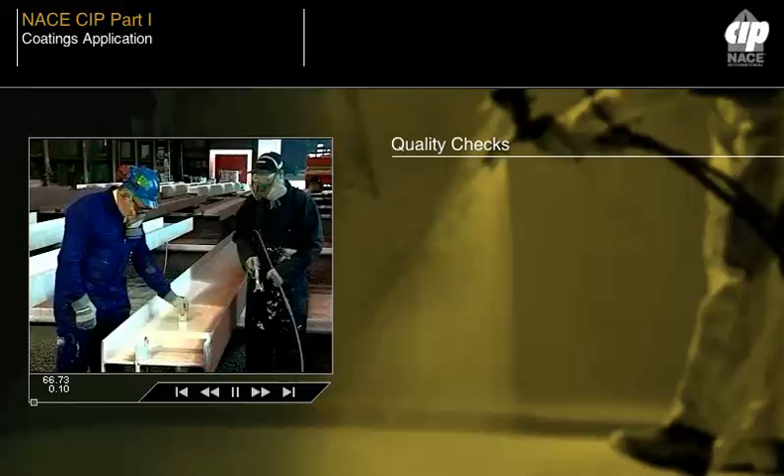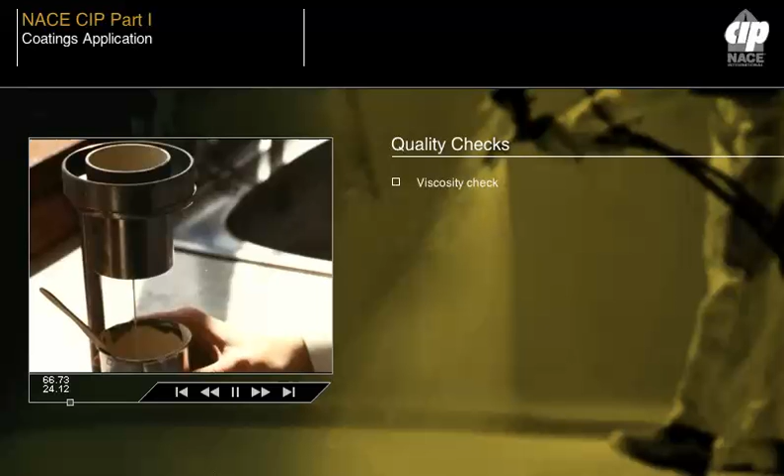The range of paint tests that may be successfully carried out on site is limited by both the difficulty of handling complex laboratory equipment and by the lack of laboratory experience of most site personnel. In practice, the common tests which may be performed are viscosity check, to check suitability of flow characteristics and quantity of added thinners,

wet film thickness check, to ensure that the film will achieve the desired DFT, visual checks on condition of paint, batch numbers, storage time, condition of paint container, label details, etc. Further visual checks can be made on the drying coating film after application, looking for coating condition, gloss, misses, pinholes, etc.

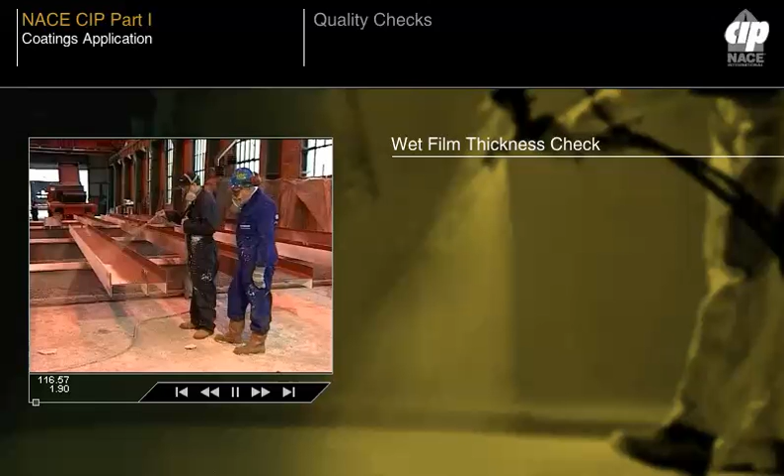Measurement of wet paint film thickness provides a useful guide for inspectors or paint sprayers to ensure that a correct and even film thickness is being applied to the article being coated. Use of a wet film comb at this stage of a paint application operation helps to prevent reject work, which in itself is time-consuming and therefore costly.

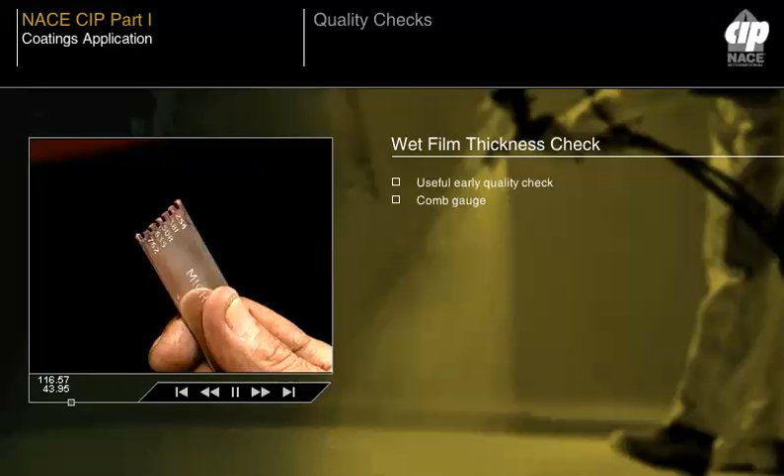The most common instrument for measuring wet film thickness is the comb gauge. It consists of a series of graduated teeth lying between two level outer ones. Combs with different scales are available. The WFT gauge consists of two end points on the same plane with progressively deeper notch steps in between.

The instrument is pressed firmly into the wet film down to the surface and withdrawn. The two end points will be wetted by the coating material and maybe some of the steps in between. It's important that the gauge is held perpendicular to the surface and not dragged across the surface.

The WFT is measured and reported as the last wet step observed. If no steps are wet, the gauge needs to be turned to a different measurement range that can measure the WFT of that particular coating. Metric calibrated WFT gauges are also available, which give coating thickness measurements in microns.

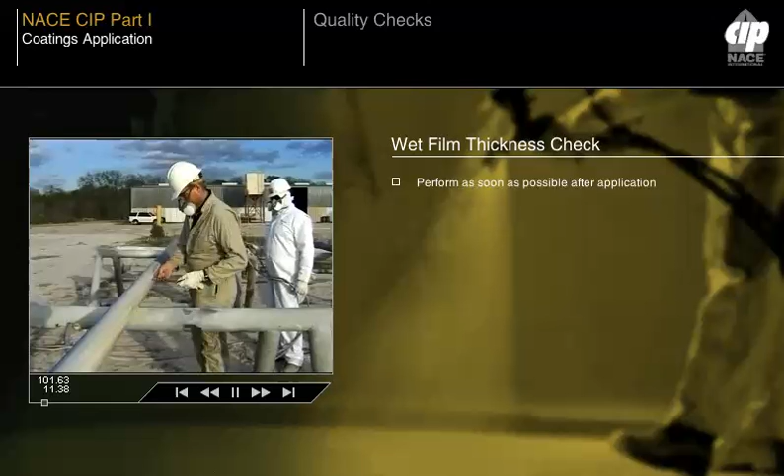Wet film thickness readings should be taken as soon as possible after coating application. As soon as coatings leave the spray gun, evaporation begins and the percentage of solids by volume changes slightly. This is especially true of spray application where the coating travels through the air.

Care must be taken that the instrument is not used on any surface irregularities that might distort the measurements. On curved surfaces, readings should be made along the length of the curve rather than across its width to prevent irregular wetting of the steps. The gauge must be wiped clean of all coating after each use to prevent the possibility of inaccurate readings due to coating buildup on the gauge.

The gauge may leave marks in the coated surface that may adversely affect the integrity of the coating. Those marks should be immediately overcoated with fresh coating to avoid pinholes. Guidance may be provided by the specification regarding use of the WFT gauge. Some WFT gauges, particularly those made of thin gauge metal or plastic, may quickly lose their accuracy and should be replaced frequently.

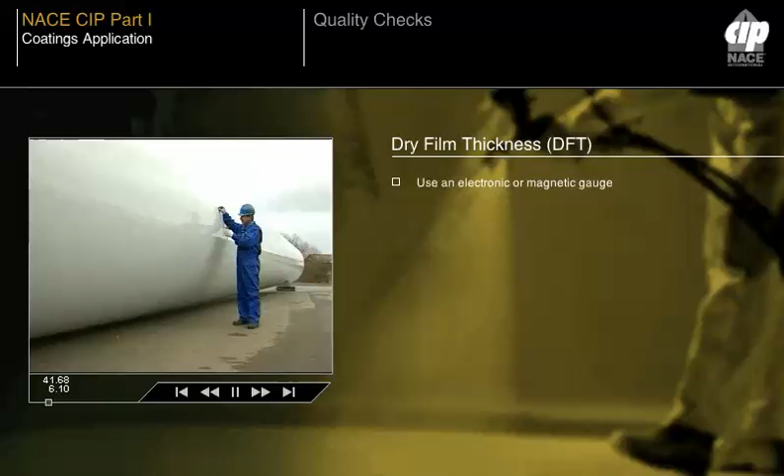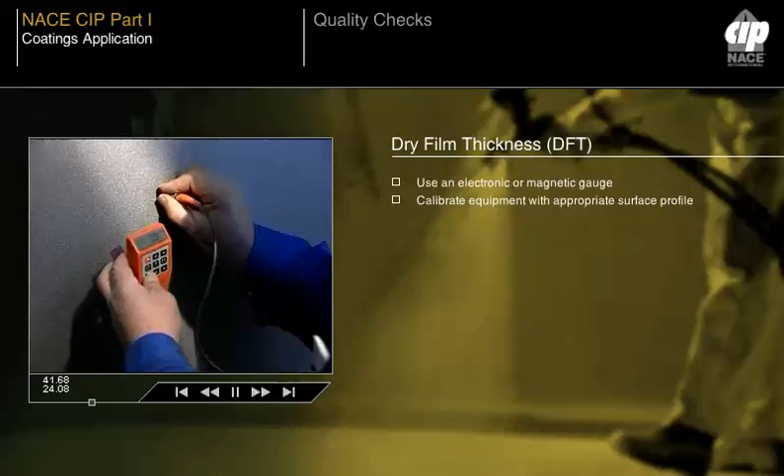Dry film thickness, DFT, will normally be measured using an electronic or magnetic gauge. The instrument must be calibrated if accurate measurements are to be made. For best results, calibrate the instrument on steel whose surface profile matches the profile of the painted surface being measured. Using shims of known thickness, calibrate the instrument in the expected range of DFT to be measured.

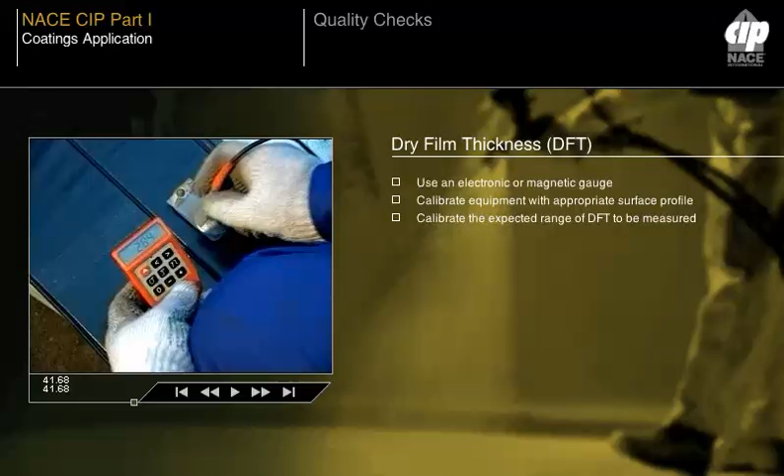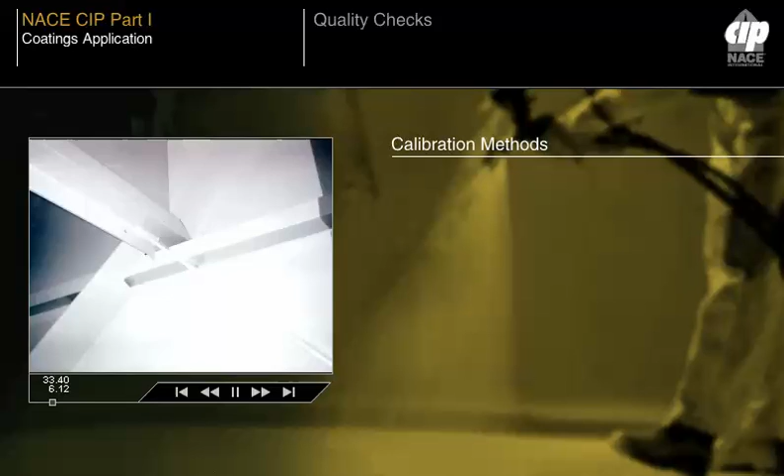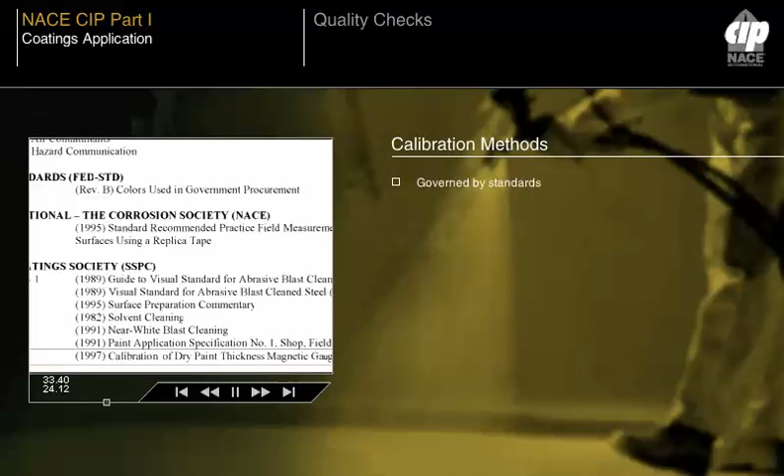Access to a clean blasted surface is not always practical, and other calibration methods may be used. Calibration of the DFT gauges is an important issue and may be governed by SSPC, ASTM or ISO standards. These standards are discussed in the inspection module of this course. When a particular standard or method is required by the coating specification, that method should be used.

In the USA, smooth calibration shims produced by NIST are commonly used. If gauges are calibrated on a smooth surface and then used to measure coating thickness over a rough, blast-cleaned surface, an adjustment must be made to ensure accuracy.

One system sometimes used is to obtain a small sample of steel approximately 6 by 4 inches, 15 by 10 centimeters, and have this blast cleaned at the start of a project. This panel can then act as a reference panel as to the surface profile agreed and a calibration panel to check dry film thickness gauge measurements.

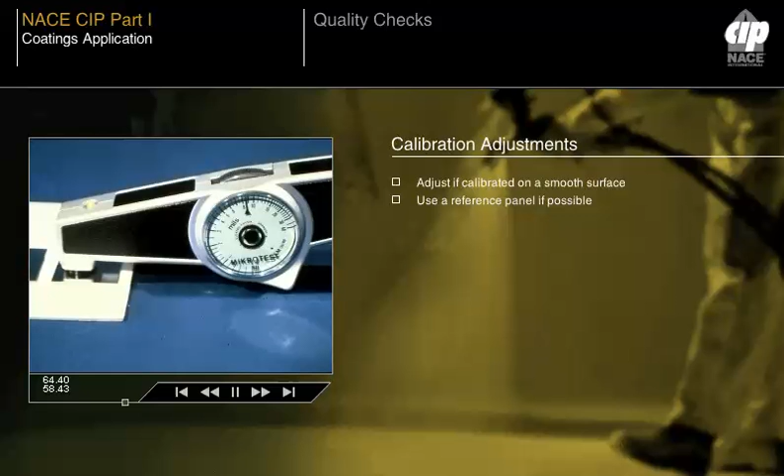The panel should be of similar material, i.e. steel alloy, and similar thickness to that of the structure being coated. Use and calibration of DFT gauges is discussed in more detail in the inspection module of this program.

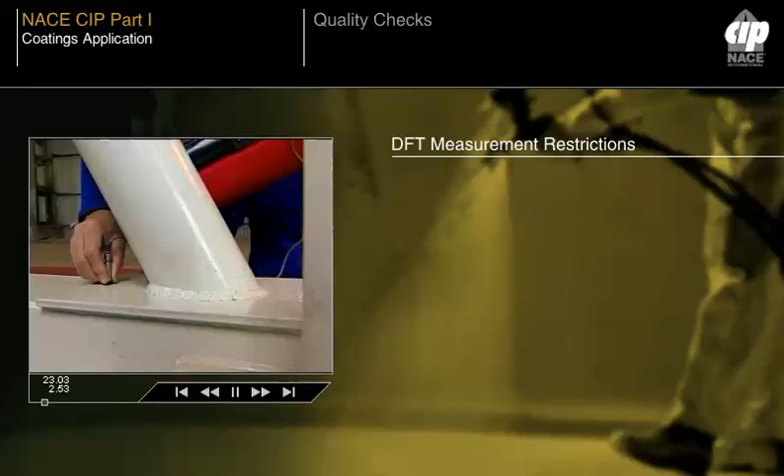It is generally not good practice to measure DFT closer than 1 inch, 25 millimeters, to an edge, hole or inside corner. The probe must not overlap the edge of the sample being measured unless recalibration procedures are undertaken.

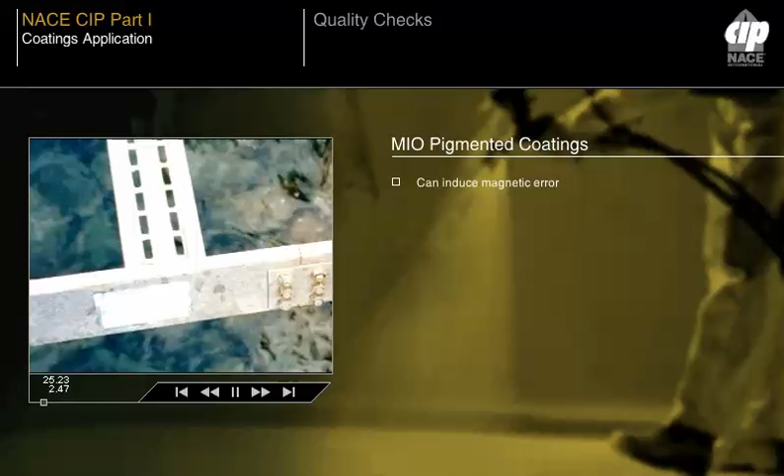Because MIO pigmented coatings are sometimes capable of inducing a magnetic error, DFTs cannot be reliably measured on some coatings, so it's important to frequently check the WFT during application. While this effect may not be common, it can create real measurement problems when it does occur.

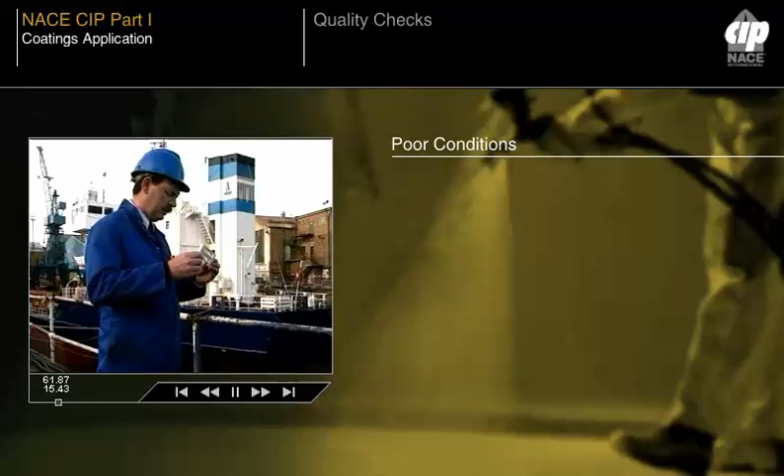Application of coatings during poor weather conditions is likely to result in a lesser quality coating film and reduced protection. Quality control on site should monitor relative humidity, dew point temperature, and the temperature of the surface being coated to avoid problems with coatings being applied to a damp surface, freshly applied coatings becoming affected by moisture soon after application,

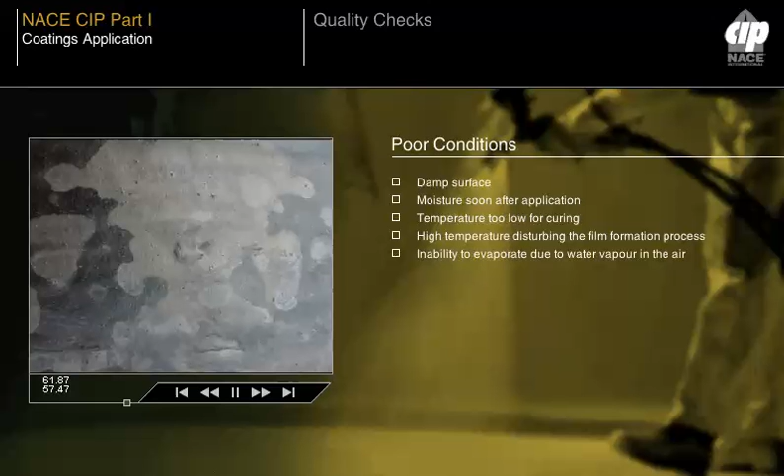coatings being applied when the temperature is too low for the curing reaction to proceed, coatings being applied when the surface temperature is too high and the film formation process is disturbed, coating solvents being unable to evaporate due to high partial vapor pressure.

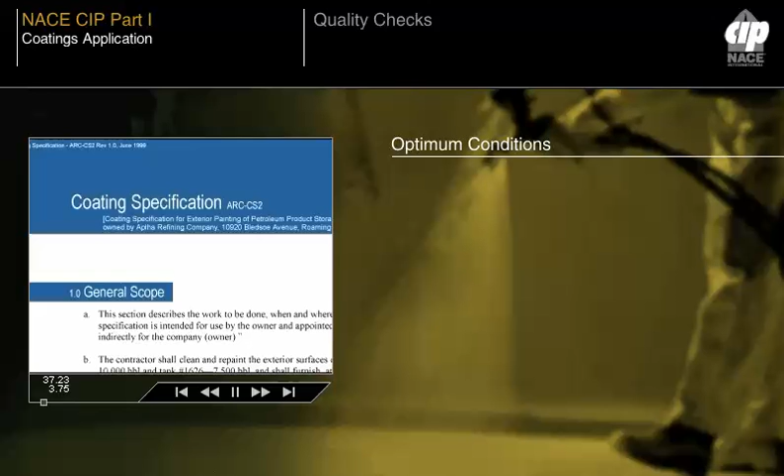As a general guide, a specification is likely to require the following conditions. Air temperature is greater than 5 degrees centigrade, 40 degrees Fahrenheit. The surface to be coated is dry. Relative humidity is lower than 90%. Steel surface temperature is at least 3 degrees centigrade, 5 degrees Fahrenheit above the dew point temperature. If any of these conditions is not met, coating application should not be performed.

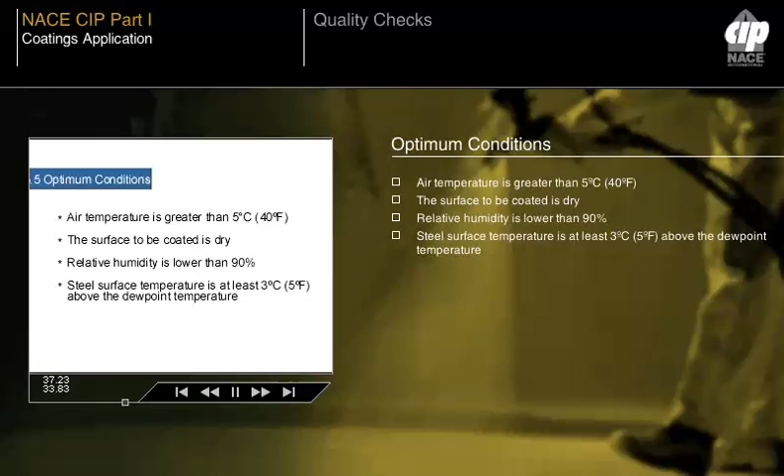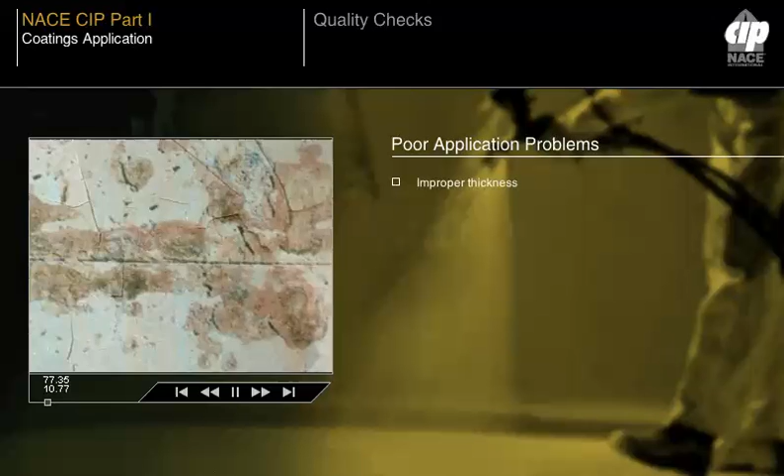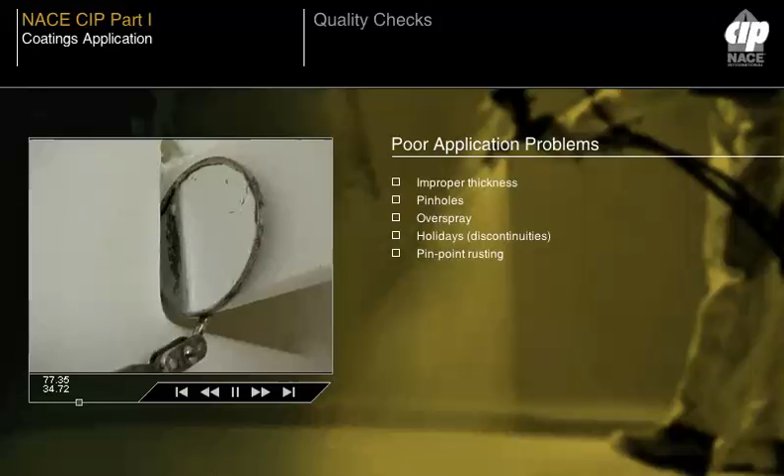Poor coating application is a major factor which causes failure. Typical problems resulting from faulty application techniques might include improper thickness, pinholes, overspray, holidays, discontinuities, pinpoint rusting. Almost all application-related failures are due to poor workmanship, though this may sound like harsh judgment. Poor workmanship refers to such practical issues as holding the spray gun too close or too far away from the surface, or at a significant angle to the surface being coated.

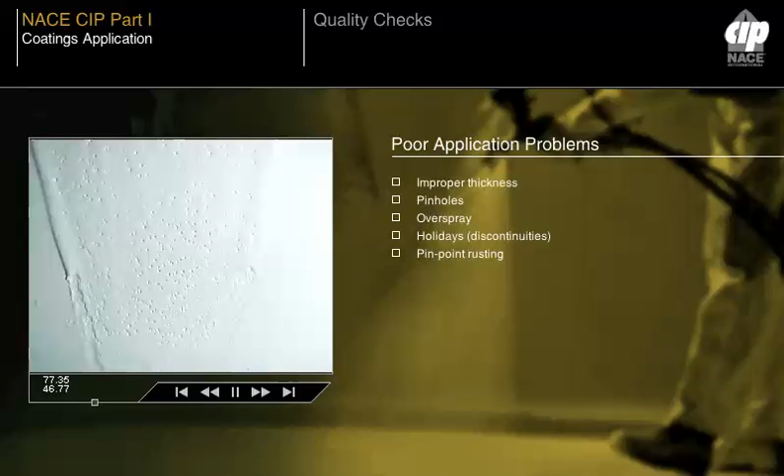These matters are largely a question of training or the lack of it, leading to a simple lack of understanding of what causes paint application problems. It is important that painters are trained in the skills of paint application, particularly those who are involved in the application of modern, high-performance coatings. Good workmanship cannot be guaranteed. The specification must require good workmanship, and the inspector must be trained to recognize an acceptable quality of work.

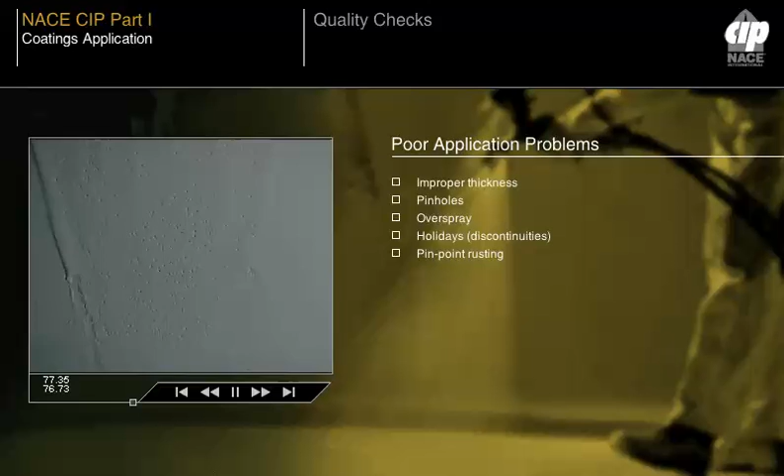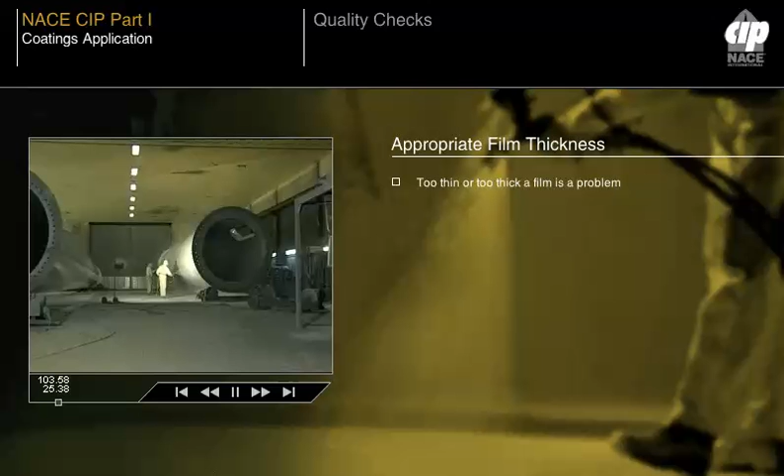If coating is too thin, pinpoint corrosion can occur. If too thick, the coating may crack. High film thickness is likely to be a bigger problem than low film thickness, due to development of stress during the coating drying and curing cycle, and is more difficult to correct than low DFT. Over-thick coatings may retain solvent, leading to problems with cure and possibly to blistering in extreme cases.

With polymerized coatings, particularly those intended to be applied at high DFT, 20 mils, 500 microns per coat or more, there may be internal shrinkage due to the excessive thickness, leading to cracking, flaking or delamination, loss of adhesion. Care should be used to ensure that the application stays within the recommended parameters, particularly film thickness.

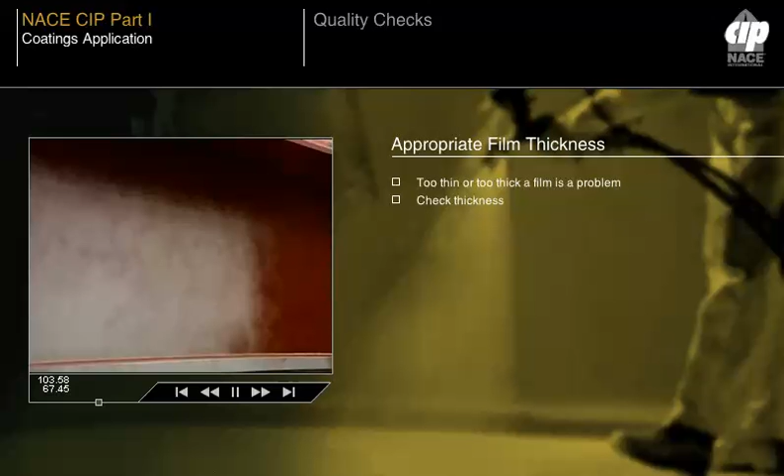Coating should be applied in an even, uniform film, allowing coating to wet the surface. Use thin, multiple passes with 50% overlapping to achieve a uniform film and ultimately the final proper thickness. Special care in application is needed for control of single coat systems. Errors in coating film thickness applied cannot easily be corrected, and it is important to get the application right first time.

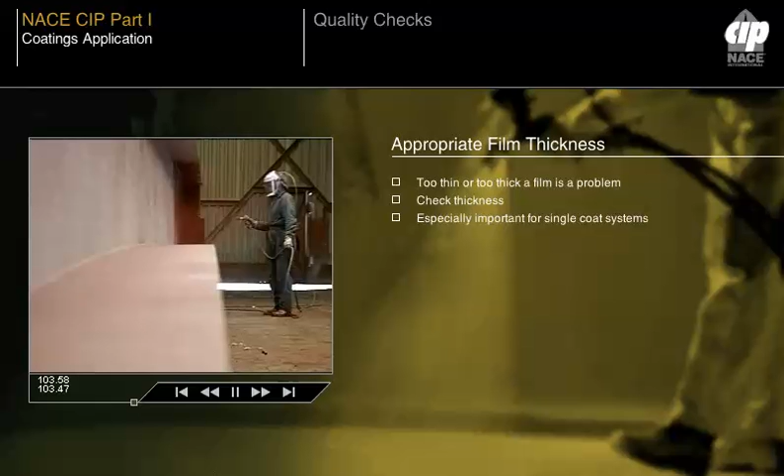Pinholes are small visible holes in a coating, often caused by application of a thicker organic coating over a porous surface. For example, coating epoxy over concrete or over inorganic zinc. Coatings with the wrong solvent balance may also suffer pinholing, caused by the inability of solvent to escape from the rapidly curing coating.

High ambient temperatures may also lead to pinholing, as the film sets more rapidly. Fast-drying coatings such as vinyl or chlorinated rubber are most likely to suffer pinholing. The fast-drying surface does not allow the air entrained in the paint as a result of spraying or the solvents to escape. The name often given to this effect is gassing. The effect can often be seen after application of coatings as a form of bubbling, rather like the surface is boiling.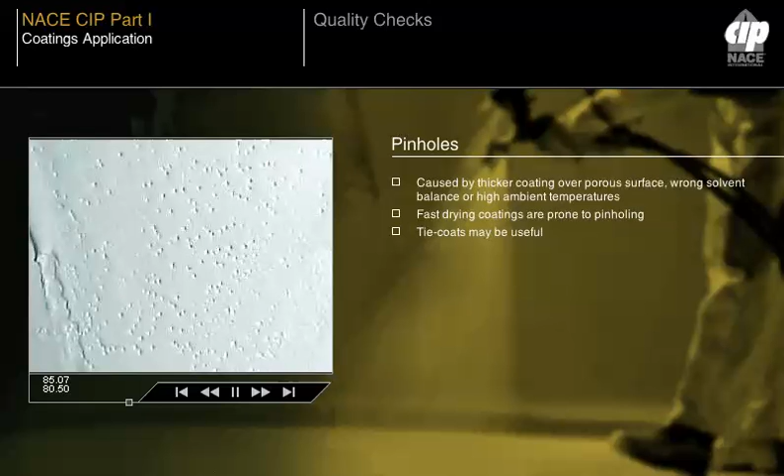Applicators may apply a thin coating, able to penetrate the porous substrate. These materials, when specially designed, are called tie coats. Alternatively, thinning the first coating with up to 50% thinner may help penetration of the substrate and achieve better adhesion.

Overspray occurs when the spray gun propels paint onto another surface which was not intended to be painted. This is most likely to occur when the applicator fails to trigger the gun, continuing to spray paint at the beginning or end of each stroke. Overspray generally adheres to the surface it reaches, leaving a rough surface. The main problem for the applicator is that coatings are applied to surfaces where it is not appropriate. The coating is likely to partially create a film, forming an ineffective barrier.

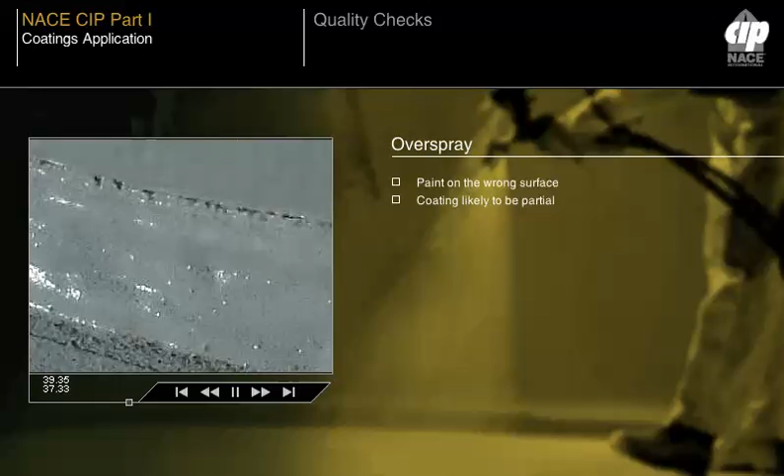Dry spray usually leaves a rough surface, which looks like abrasive dust in the surface of the coating. The dry spray is poorly bonded to the painted surface and may, in some cases, provide sufficient dusting to prevent adequate bonding of the next layer of paint, leading to an adhesion weakness in the system. The problem may be compounded by the entrapment of real dust and other contaminants in the rough surface of the dry spray prior to the next coating operation.

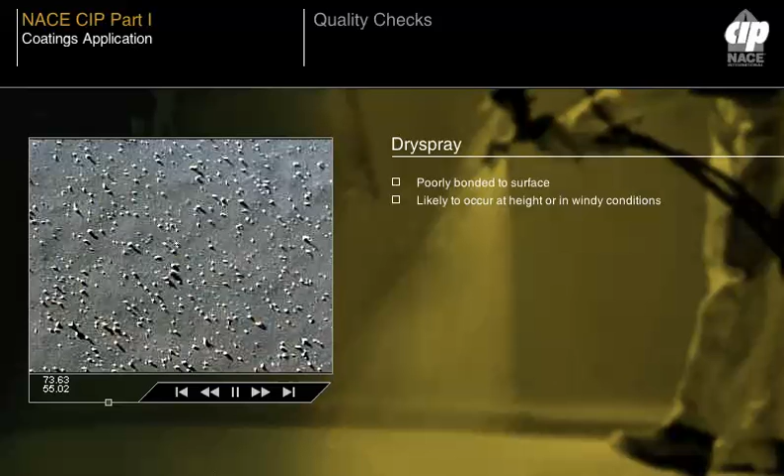Dry spray is most likely to occur when the painter is working at some height and the escaping paint particles can fall, drying as they go, or when the wind is blowing and paint particles can be carried by the wind. The applicator should ensure the spray gun is properly adjusted and apply coatings at the optimum distance to the surface. The coating should be fluid when it reaches the structure and wet the surface with good flow out. Coating should generally be applied in several multiple passes, overlapping 50%.

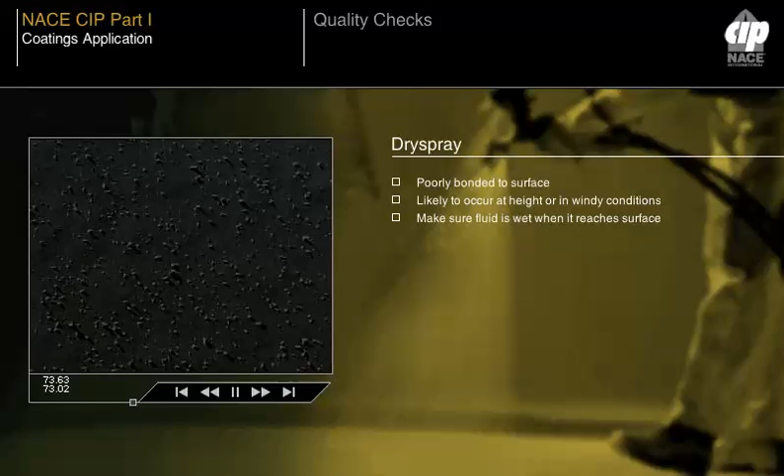Holidays are bare spots, misses, or even thin spots in a coating where the substrate is uncoated. They are generally more significant when the coatings are linings intended for immersion service. Pinpoint corrosion can occur, and premature coating failure is likely to be associated with any holiday.

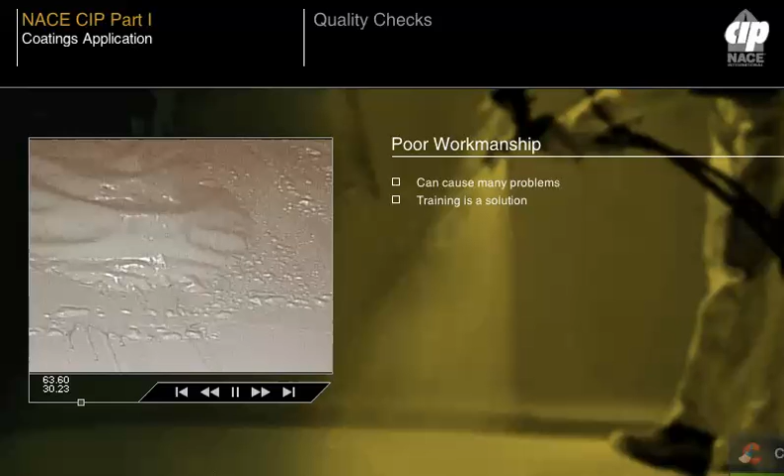Poor workmanship can encompass many factors of application faults, any one of which could cause or promote an active coating failure. Applying coatings over visible contamination, applying coatings improperly, either too thin or too thick with runs and sags, with pinholes, overspray, etc., could all be corrected or avoided with better application techniques. Poor workmanship can be overcome to some extent by training. This subject is discussed in some detail in the advanced module.

Proper training is essential, however, if the trainee worker is to become part of the team. Workers should be given the opportunity to understand the effects of workmanship on coating performance. It should then follow that they will develop confidence and pride in their workmanship that can go a long way to offset any application faults that reduce the life of the coating and lead to a coating failure.

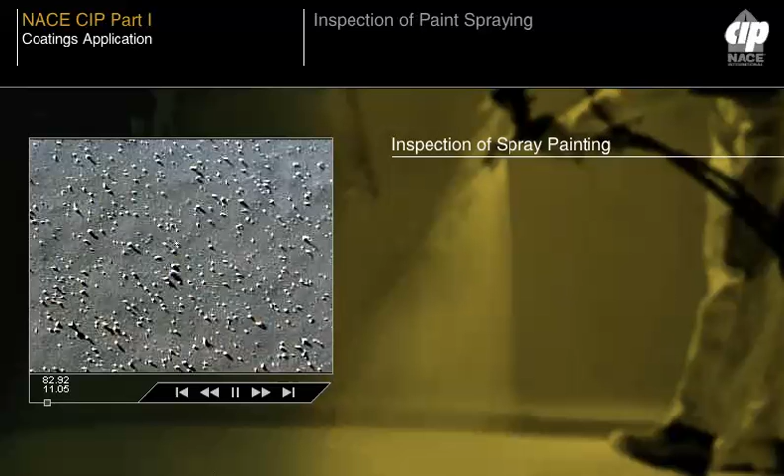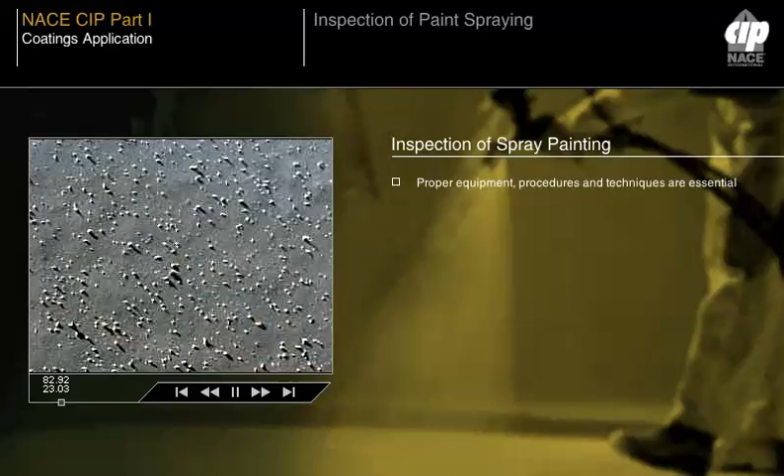The coating inspector must pay careful attention to the spray application of coatings. Many coating defects originate in the spray application phase of the job. Proper equipment, procedures and techniques are essential to a successful spray application of any coating. Equipment for spray application should be examined to determine whether it has adequate pressure regulating devices and accurate gauges.

In this connection, the inspector should be aware that the single pressure regulator and gauge found on many coating pressure pots controls only the pressure within the container and not the pressure of the air that atomizes the coating. With a single regulator, the atomizing pressure will be equal to that at the receiver of the compressor, minus the pressure drop in the hose lines. If the receiver pressure cannot be controlled to suit spraying operations, an additional pressure regulator must be inserted in the line between receiver and spray pot or between gun and spray pot.

Hose lines for spray equipment should be of large enough diameter to prevent excessive line drops in pressure, and compressors should be of adequate capacity to handle all air tools and equipment being used at one time. The interior of the fluid line must be clean.

Traps and separators for removing oil and water from the compressed air source should be operating and effective to ensure that the air does not deposit visible oil or water on the surface. The quality of spray air can be checked using the blotter test, ASTM D4285, just as in checking the quality of abrasive blast air.

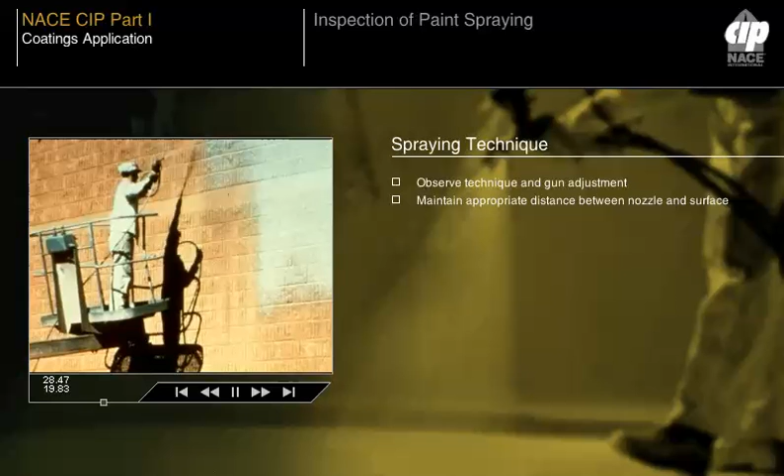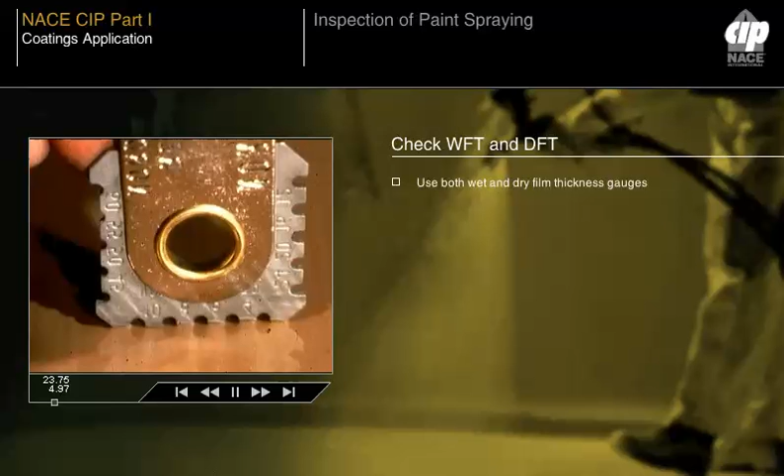The technique of the operator and the adjustment of the gun should be observed for any deficiencies that would result in non-uniform coating thickness. The use of the wet and dry film thickness gauges to point out areas of widely varying film thickness will generally have a very beneficial effect on the efforts of the spray painter to deposit uniform coatings. The dry film thickness gauge should be used to determine the final acceptability of the coating.

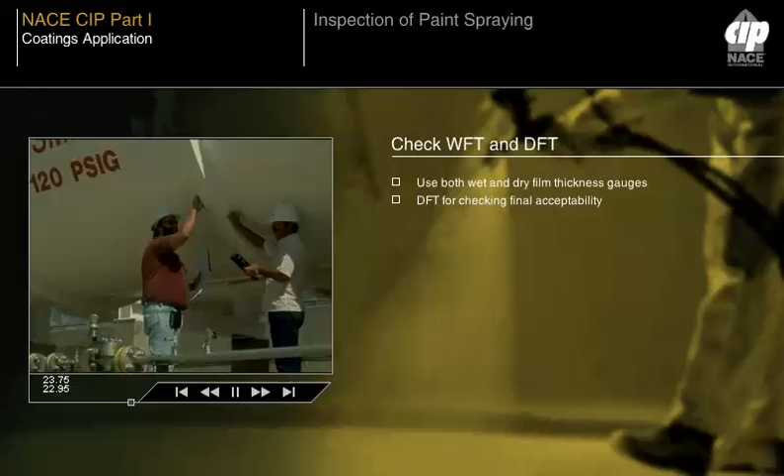The inspector should pay particular attention to the spraying of crevices, corners, welds, bolts, rivets and sharp edges, since these areas are generally slighted in spray application of coatings and cannot easily be checked with a film thickness gauge. Surfaces hard to reach by spray application should be brushed or swabbed with coating.

Some coatings have a tendency to bridge across instead of fill cracks and crevices in the substrate. If called for in or allowed by the specification, a stripe coat should be applied to cracks, crevices, welds, etc. Stripe coating consists of brushing the coating into cracks, crevices and corners, etc. in order to work the coating into the narrow openings.

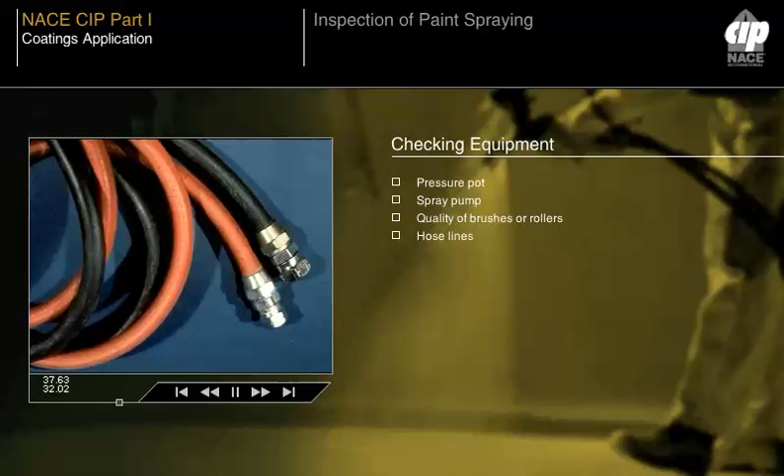With regard to coatings application procedures, some of the coating inspector's responsibilities may include determining that proper application equipment and coating materials are on site, including pressure pot with agitator, pressure regulators and gauges for conventional spray equipment, spray pump for airless spray, appropriate quality brushes or rollers, hose lines, air and fluid if necessary, moisture traps and oil separators, spray guns.

Other responsibilities may include observing and verifying procedures for handling coatings, including mixing, thinning, agitation, safe storage, shelf life. Observing application techniques, including proper working pressures, uniform distance from workpiece, specified WFT and DFT are achieved, proper coating of hard-to-reach areas,

review of safety issues, including fire hazards, breathing equipment, MSDS information available. The inspector needs to ensure his or her own safety. This is best accomplished by knowing and following the job safety rules.